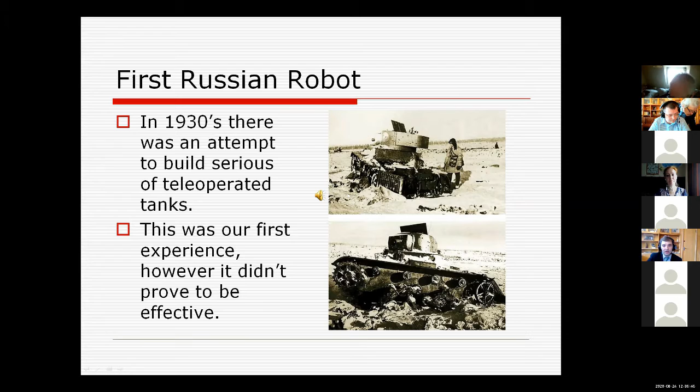But to tell you the truth, finally, this experience was not recognized as successful, as effective, and this program was cancelled. Our first success came in the 1970s with the two moon rovers called Lunokhod. The two rovers were launched, one in 1970 and another in 1973. Both of them were teleoperated, so the crew was sitting on Earth and sending signals to the rover. Then the rover was performing an action, and feedback was coming to the operators, and they were watching what was happening and creating new commands.

Of course, maybe from our today point of view, this was a rather primitive system. However, I want to admit that the record of the extraterrestrial trip of these Lunokhods was overcome only 40 years later, so about 5 years ago, by the NASA Mars rovers.

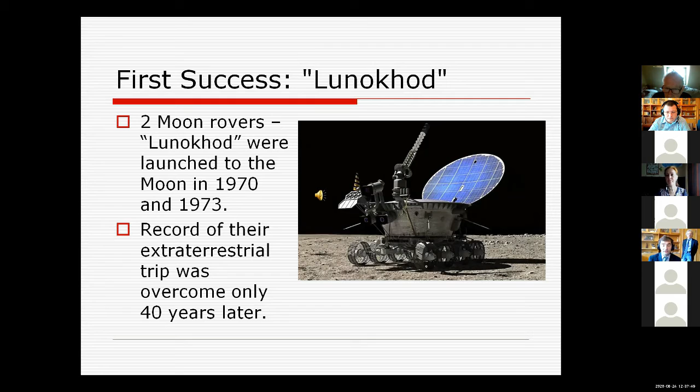In the 1970s and 1980s, there was a big challenge to robotize Russian industry, and there was a special national program, and about 100,000 industrial robots were built and installed within Russian industry. You see a photograph of some of them, and a lot of robots were produced in Russia at that time. Most, of course, were used in the automotive industry, but also in other industries.

And when I was an undergraduate student, we used to have a traineeship in one of the factories in Moscow, and we saw them working with machine tool systems. However, to tell you the truth, this experience was not so successful. Also because some of these robots were not reliable enough. Also because the philosophy of bringing robots to industry at that time was just replacement of the human worker.

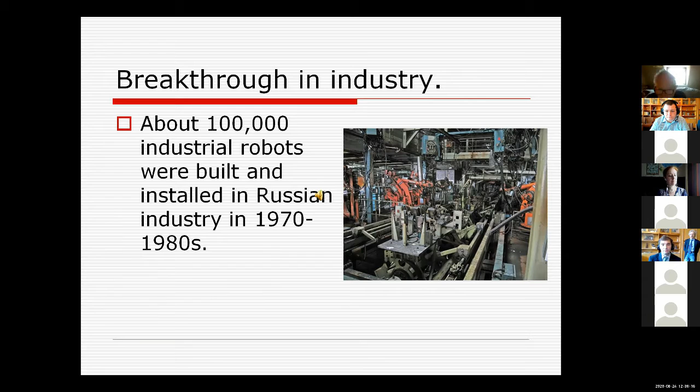However, this turned out not to be a correct philosophy, because bringing robots to industry is creating a new way of technology, a new industrial concept, which was not understood at that time, and those 100,000 robots didn't bring a big effect to national industry. Actually, a big challenge came in 1986.

I call this slide "nothing so bad as not to be good for something." It came with the Chornobyl Nuclear Power Plant catastrophe. As you know, it happened on the territory of modern Ukraine, but at that time actually all the Soviet Union had to deal with this catastrophe. And one of the tasks was to collect radioactive debris from the roof of the nuclear power station.

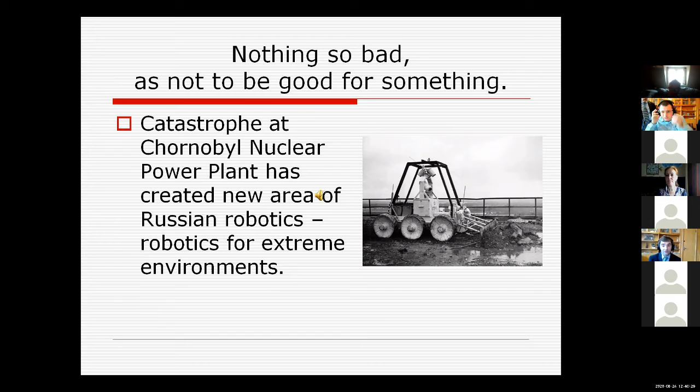Initially, some robots were brought from abroad, but the level of radiation was so high that microelectronics couldn't function. We said that the robots became crazy. They stopped being operable. And then several robots were built in Russia, and one of them you can see on that very roof. And actually it gave a new impetus for the new area of Russian robotics, which we call robotics for extreme environments. And we believe that those robots have saved the life and health of hundreds and maybe thousands of people.

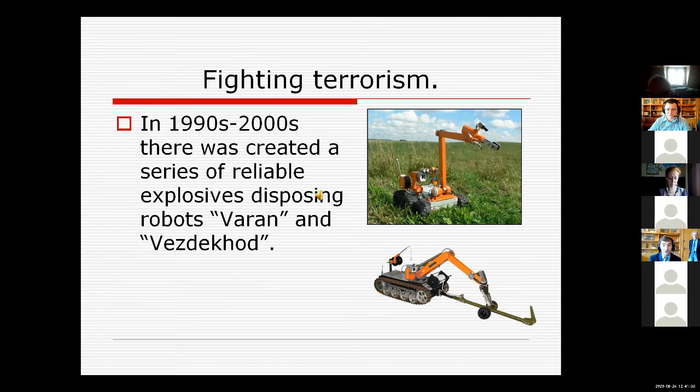Later, of course, the drastic economic transformation in the 1990s caused some decline in Russian robotics. However, some robotics still survived and acted. As you know, in the 1990s we had problems with terrorism, especially in the Northern Caucasus, and this called to life a series of reliable robots which could dispose of explosives. They were called Varan and Vezdekhod, and they were designed at the Bauman Institute in Moscow and produced at the Kovrov electromechanical factory. Several thousand of these robots were built and are still acting in security offices all over Russian territory.

Another stream for nuclear plants was generated in the 2010s when Southern Federal University, together with the Russian Atomic Agency, created a robot for manipulation with fuel elements at nuclear power stations. As you know, fuel elements have to be removed from time to time, usually once a year. They have to be removed within the reactor. And during this removal, the reactor is not functioning, so the power station is not producing electricity, which is a loss of efficiency.

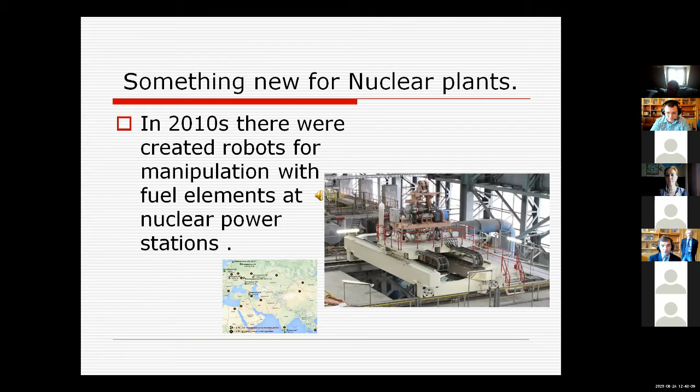And a team of these prominent people created a robot to make this manipulation with fuel elements. And besides manipulation, a big deal of trajectory optimization and control of the functionality of fuel elements was done, and through introducing, I think, 6 or 7 of these robots within Russia, we got more than 300 million dollars of additional income to atomic energy each year, because the service time was decreased. And some of these robots were also installed abroad, outside of Russia.

Another interesting company producing robots for municipal services is called TARIS. You can see one of them on this picture. They have produced a series of robotic crawlers for pipes of different diameter and of different functionality. And it could not only inspect the pipes, but it also could make simple repair works within the pipe. And some of these robots were first produced for Russian municipal services, and some were exported to other countries.

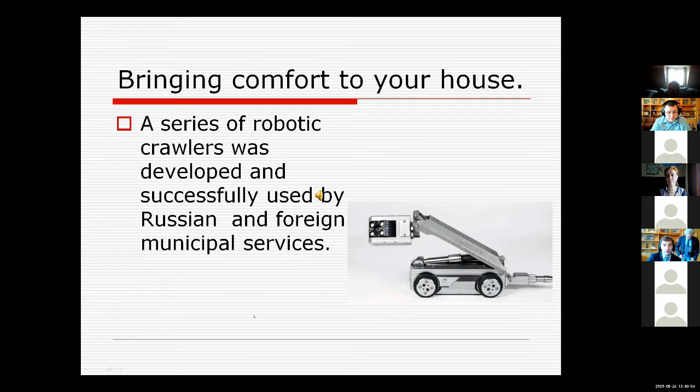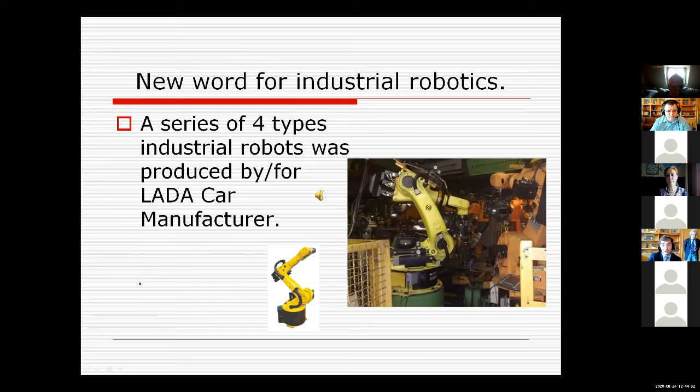In the 2000s, a new industrial robotic program was started by LADA Car Manufacturing, because the automotive industry was still the main consumer of industrial robots. And a special department of this car manufacturing company created 4 totally new types of industrial robots, and they were produced and installed within the factories of LADA car manufacturers.

Now let's speak briefly about the main players. Of course, I would not be able to name all the robotic laboratories and companies within Russia. It would take a lot of time.

However, I wanted to give you an overview, and I also hope that with this you may find some possible partnership links for your future research.

Now, as I promised you, a couple of words about Russian Academy of Sciences. In 3 years from now, it will celebrate 300 years. It was started by our Tsar Peter I. And actually now, Academy of Sciences unites about 400 research institutes. And what is the most interesting, that they come from various research aspects: from humanitarian, from medicine, from agriculture, from mathematics, physics, mechanics, informatics, biology, and so on. So this gives us, as I said before, a special opportunity for cross-fertilization and for getting new ideas, because we intensively communicate with each other.

In our Academy of Sciences, we do not have a special separate institute for research in robotics, but these activities are coordinated by Scientific Council for Robotics and Mechatronics of Russian Academy of Sciences. And as you know, it has participated in helping to organize this conference. And this council unites about 50 specialists in robotics from all over Russia. And what is important, not only from academia, but also from industry, from university, from decision-making governmental bodies. So it's a very good place to meet and to discuss the needs, the possibilities, the opportunities in our robotics research.

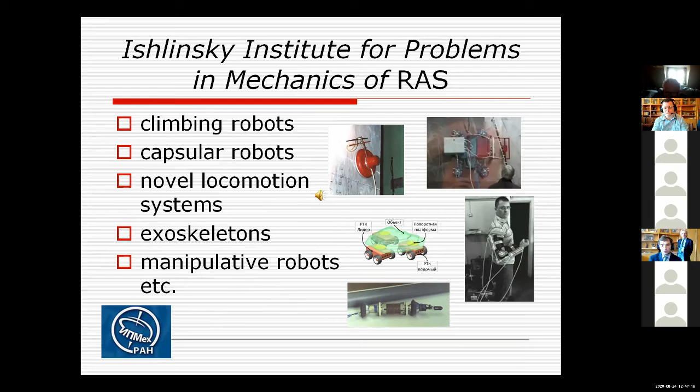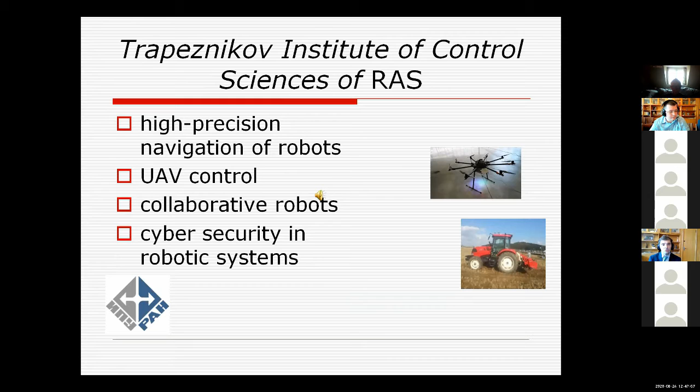Our, I call it a brother institute, is Institute of Control Sciences of Russian Academy of Sciences. They have some good achievements in high precision navigation of robots. You know, it's especially important for robots in agriculture when you need precision better than decimeters. It also has good results in unmanned aerial vehicles control, collaborative robotics, and a new area they have started: cybersecurity in robotic systems.

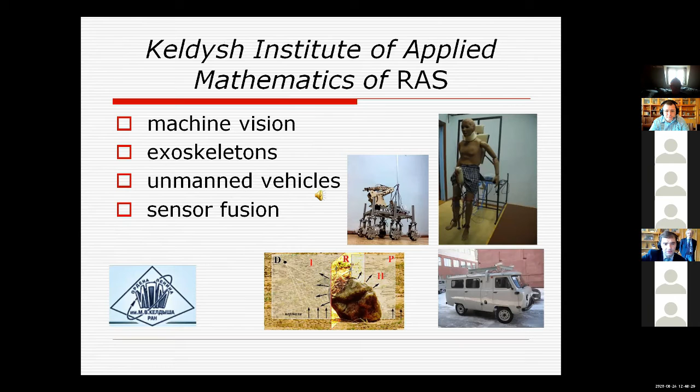Another institute is called Keldysh Institute of Applied Mathematics of Russian Academy of Sciences. They make research in machine vision, also exoskeletons, especially with application to the medicine. And they have a special program for unmanned vehicles. You can see it on one of the photographs below, and research in the area of sensor fusion.

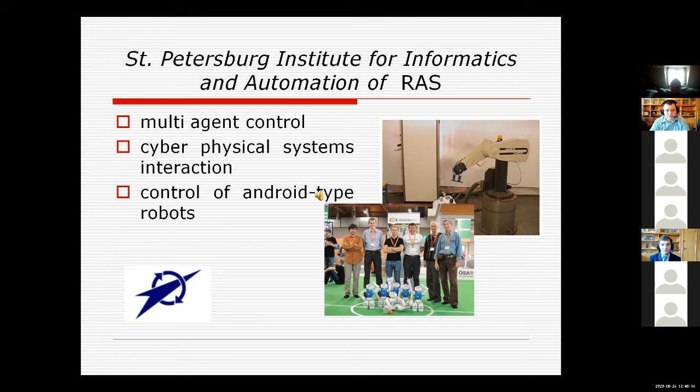Now continuing with Russian Academy of Sciences, but if we move outside of Moscow, it's of course St. Petersburg Institute of Informatics and Automation of Russian Academy of Sciences. You see they have a very active team in the area of multi-agent control, and they participate in a lot of international competitions in this area, like in robotics football. It's also cyber physical systems interaction and control of Android type of robots. On the other photo below, you can see there was a special research done in the manipulative robot for the space program.

Now, Mechanical Engineering Research Institute of Russian Academy of Sciences, it's back in Moscow. They are very good specialists in manipulators with a closed kinematic loop. Actually, they have done a big research on different types of closed kinematic loop manipulators and have studied the efficiency of various schemes and produced recommendations which could be very useful for building new robots.

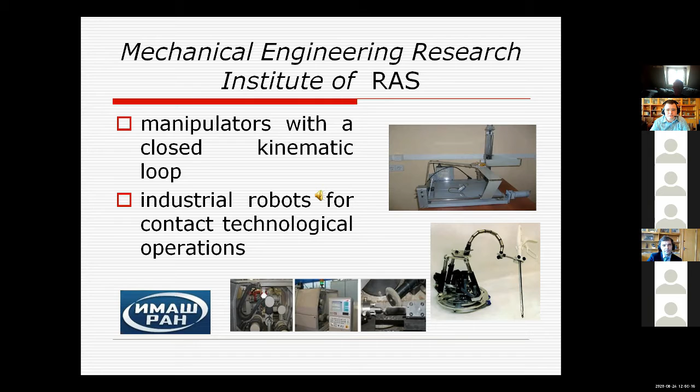And also they have some good advanced results for bringing industrial robots for completing contact technological operations, like polishing turbine blades. You can see it on the photograph below, and some of their robots are installed in the aviation turbines factory in Moscow.

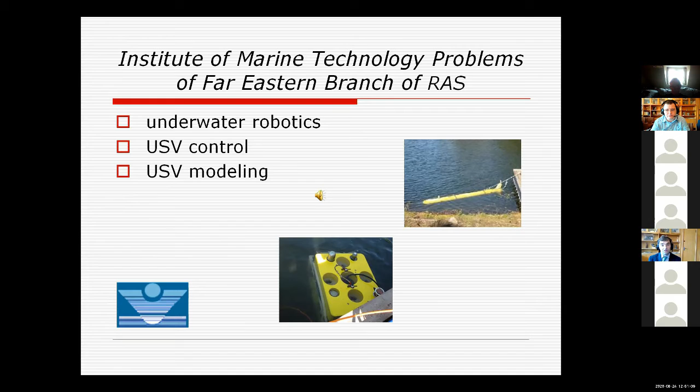Now, if we move to the Far East, we have there an Institute of Marine Technology Problems, and an interesting fact is that for maybe 20 or 30 years, this was the only body in Russia producing submersible robots. So no company was producing, only this academic institute was producing underwater robotic systems. And of course now they are joined by big maritime technology companies, and now this institute can specialize in submersible robots control and modeling, where they're very good experts.

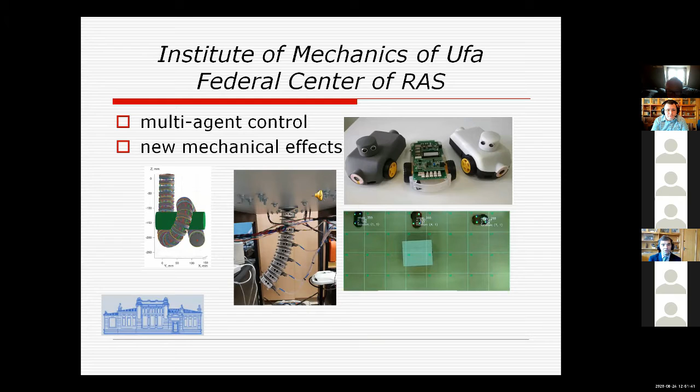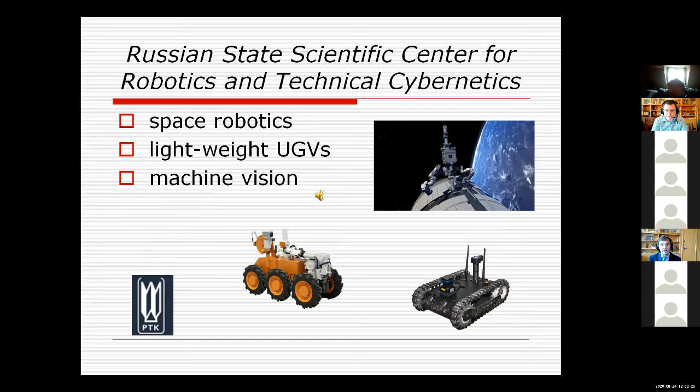Now we speak about other universities and research institutes outside of Russian Academy of Sciences. In St. Petersburg, we have a big research body which is called Russian State Scientific Center for Robotics and Technical Cybernetics. Actually, this center initially was started as a center for design and building robots for the Russian national space program. And they are very good specialists in space robotics. I know they have some good collaboration links worldwide, but also they produce lightweight unmanned ground vehicles and have a strong position in machine vision.

Back in Moscow, Bauman Moscow State Technical University. This university, I would say, is the chief research body among universities in the area of robotics, because they have a large variety of robotic research spectrum field. It's industrial robotics, unmanned ground vehicles, unmanned submersible vehicles, medical robots, and now, as far as I know, they create a totally brand new center for robotics and automation, which I hope will be started next year, which will unite under one roof almost a dozen robotic departments within one university.

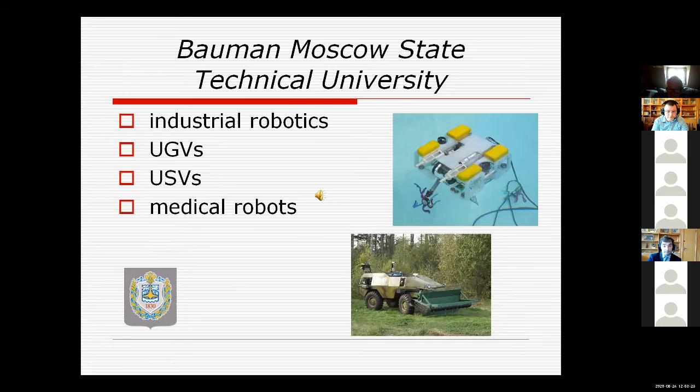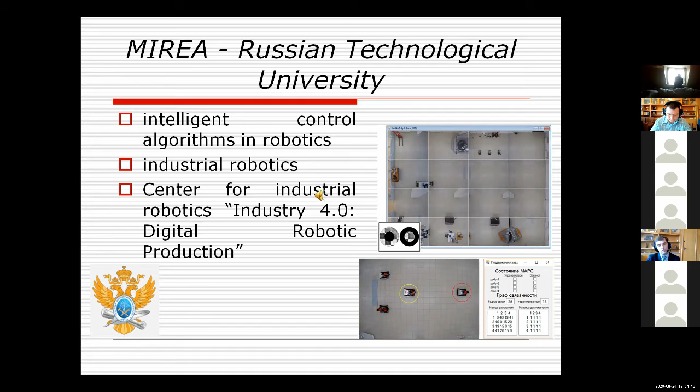What was very challenging for me within this center is that at one place, in one virtually closed system, they were able to present the collaboration of several generations of robots, starting with robots built in the 1980s, 1990s, and up to top modern robotic systems. And all of them were acting in one big system.

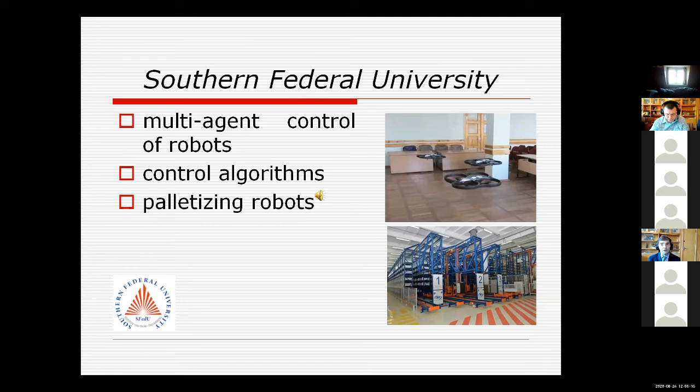Southern Federal University is a big university which unites a lot of research institutes, and one of them has a long-term history of multi-agent control of robots, and I consider that it is the chief research body in the area of multi-agent control for robots. It also has some good results in control algorithms. And as you see on another photo below, they have very good results, and they have also introduced palletizing robot systems to several industrial points.

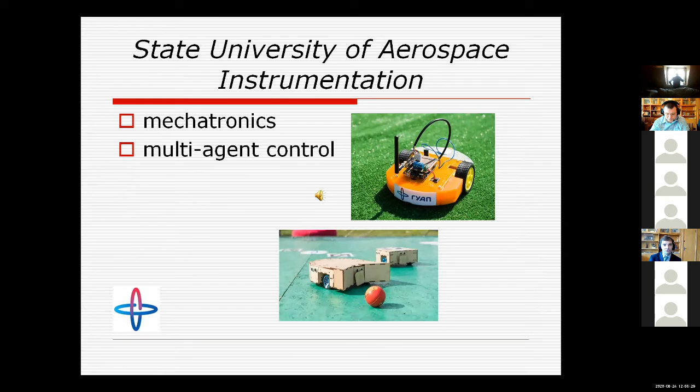Back to St. Petersburg State University of Aerospace Instrumentation, with mechatronic drives and multi-agent control. If we go to the Volga River, Kazan Federal University has a very strong team in the area of intelligent control algorithms, and I believe there are several presentations of theirs within our conference. And they also started a new program in industrial robotics because they have a strong industrial sector in the area of Kazan, especially the aircraft building sector, and also a medical robots program.

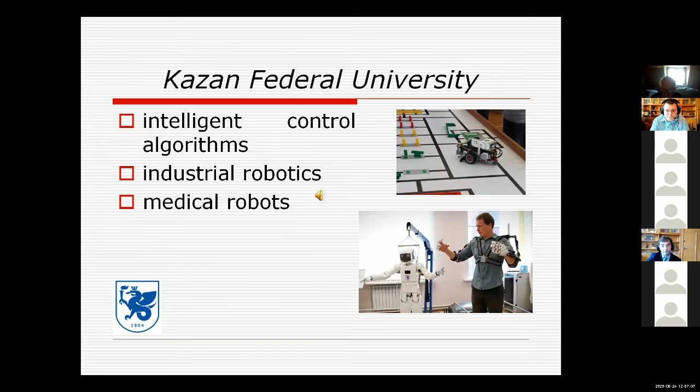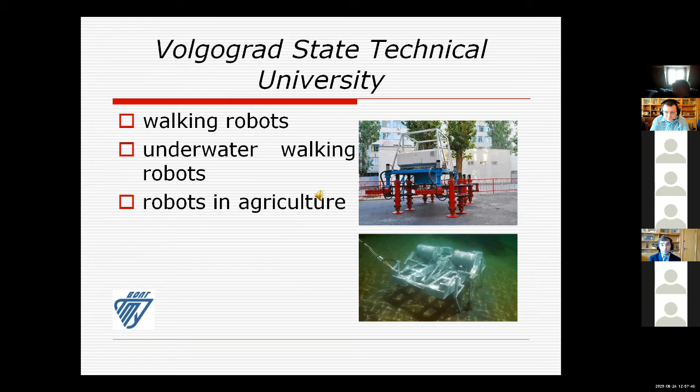Now, our colleagues from the famous city of Stalingrad, now called Volgograd, Volgograd State Technical University. I know they have a lot of presentations within our conference, and the key topic is walking robots. You see one of them on the top photo, and now they bring their robots also under the sea. I hope they will present some of the robots within the program of our conference. Those robots are very effective in agriculture and in emergency systems.

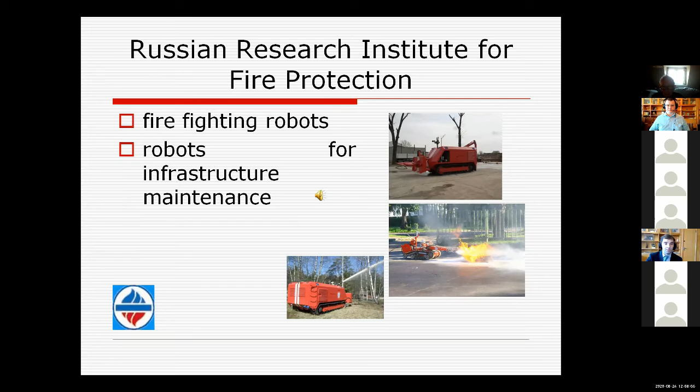Some of the robots are produced for infrastructure maintenance, which is a key topic for a lot of robotics around the globe now. And also very good colleagues of mine at the Dukhov Automatics Research Institute, which is part of the Russian Atomic Agency. As I said, after the Chernobyl nuclear power plant catastrophe, there is a demand that each Russian nuclear power station must have rescue robots on its territory in case of an emergency situation. This company, Dukhov Automatics Research Institute, is responsible for building these robots, training operators, and in case of need, bringing more of these robots to the place of emergency, and they have some very good results in this area.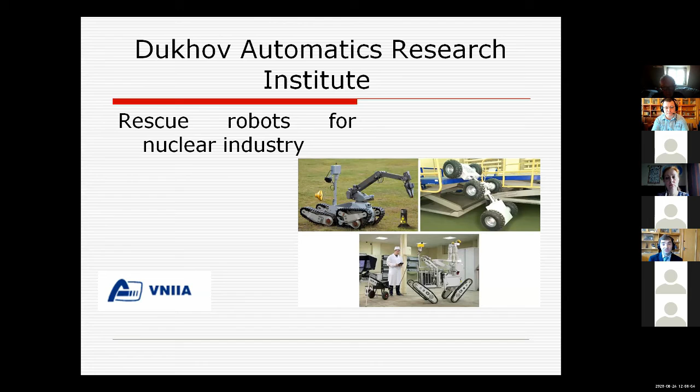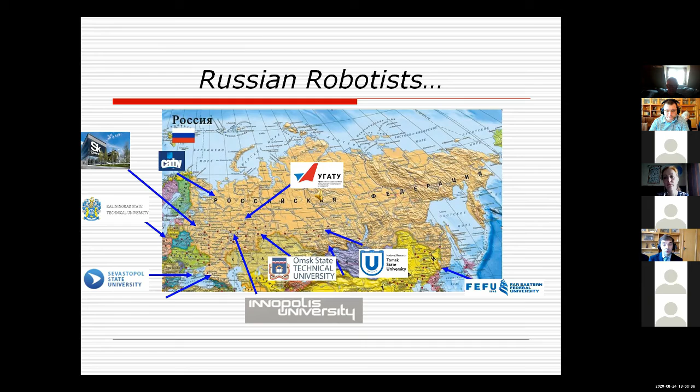As I have said before, there are more places on Russian territory and more universities, like lately we have so-called Skolkovo University, or the special university in Innopolis, Sevastopol in Russian Crimea, Kaliningrad, North Arctic University, Omsk deep in Siberia, Tomsk, which actually has several universities specialized in robotics. And I advise you, in case you are interested, you can either contact those colleagues directly, or you may contact me, and I would help you to build possible collaborative links with those people.

Now, speaking about our view for the future, actually, I hesitated, but finally I decided to bring you this slide, which is called Why Robotics in Russia. First, its industrial potential. As you know, Russia now tries to revive its industry, which suffered a big breakdown in the 1990s. So there is a lot of work for Russian robotics.

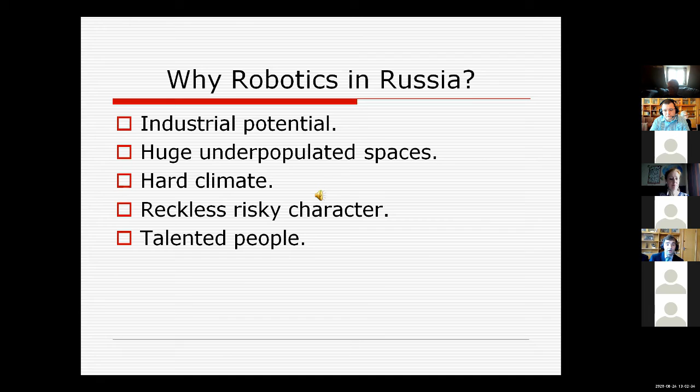And finally, two ideas came to my mind: actually Russians have a, let's call it reckless, risky character. This term came from one of my German friends who said, you know, if you need to invent something to send to the moon or to space, something risky, you should call Russians. That's in their character. They like to do risky things. And finally, we also have, as other nations, talented people, and we believe that we have a good word in the robotics future.

Now, to be more serious, what do we have as future development in robotics? We foresee 5 main dimensions. It's a search for new applications of robots, because we still consider that there are more possible areas for robots to be used in industry, in human society, in research, and so on. Still, all of us who are professionals in robotics must admit that in a lot of cases we are not satisfied with the level of performance of modern robots, so we should increase the efficiency of modern robots. Of course, we should move to application of robots in groups, and this calls for a new challenge to make modern robotic systems more autonomous.

However, autonomy is a good thing, and I'm in favor of it, but still we admit that the majority of modern robots, especially in some important applications, are still controlled by humans, and that's why human-robot interaction, the human-robot interface, is another aspect which we should further work on, especially considering the ethical aspect that in some robotic applications, like robotics for security, a human will always have the final word to make his or her decision for the robot to act.

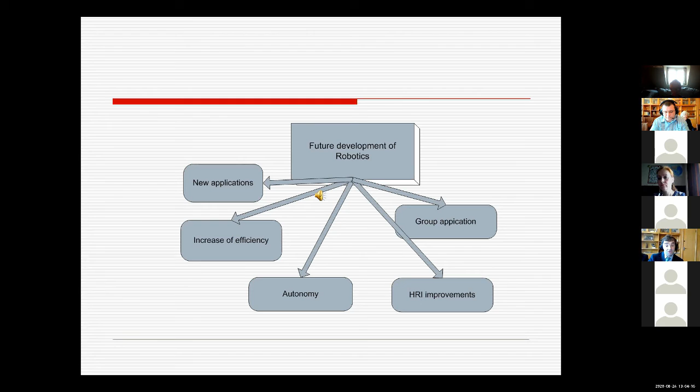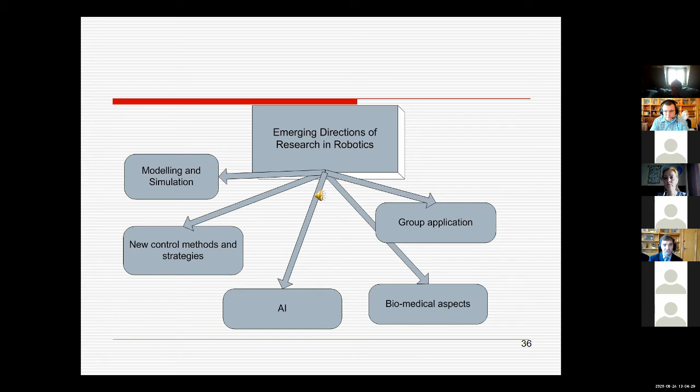As an outcome of this, we see the following emerging directions of research: modeling and simulation, new control methods and strategies, artificial intelligence, group application, and biomedical aspects. Speaking of modeling and simulation, we think that we should produce more advanced modeling of various robots, especially for robots acting in severe or difficult environments. We should create new application scenarios and model those scenarios and simulate them.

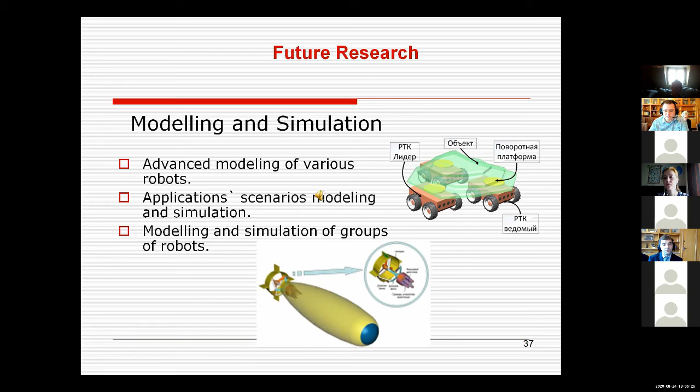Actually, from my point of view, in our future, every company producing robots and selling to the end user should sell not only the robot itself, but also a ready-to-use model or simulation software, so that before using a robot, the end user could check if he really needs it, how he or she would use it. And also a model and a simulation of a group of robots.

Now, new control methods and strategies. A big challenge from my point of view: if you look at the scheme on your right, you see the one produced by us, a hierarchical scheme of control levels, and we try to separate various control tasks performed by a robot into 5 areas. You know, there are various architectures. We have produced this one because we consider it's more intuitively understood by the end user. And sometimes within conferences, and I believe also within this conference, we would have a discussion about which method is better or worse to solve this or that task within the robot.

From my point of view, we would never have universally perfect control methods which would be able to solve all control tasks for the robot. And I believe that for various control levels, for various levels of hierarchy, we would have this or that most effective control method to implement the task. For example, for parameter identification of control in one drive, we know PID. If we go further up, we would have fuzzy logic, neural networks for object recognition. Later we have deep learning algorithms. But if we go up and up and up, I believe we still have to search for which methods are the most effective.

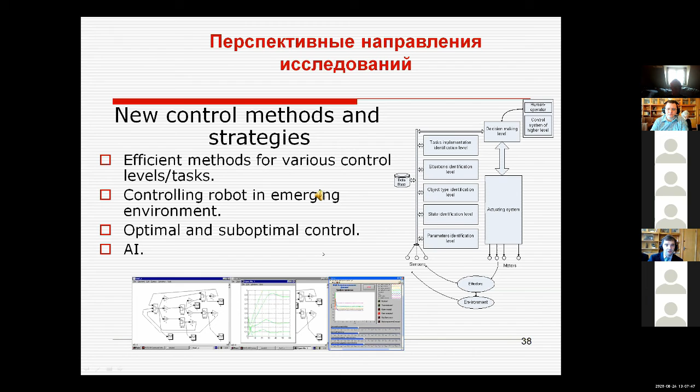Returning to control tasks, it's controlling robots in emerging environments, especially in fast, drastically changing environments, optimal and suboptimal control and artificial intelligence algorithms. Now, for group application, it's methods of controlling robots in various groups for various applications. A big deal: we have to solve the problem of communication of robots within their groups.

And finally, we should always keep in mind that despite unmanned systems on our roads, which are appearing and would appear in more quantity soon, still a lot of systems would be human-driven. And the question of integration of robots with these human-driven machines should still be kept in mind. We should keep them in mind and produce new scientific methodology, new technology to incorporate such systems into one effective system.

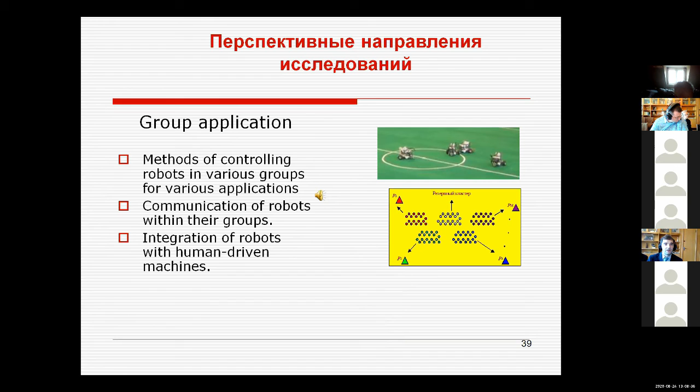And now, speaking of biomedical aspects, we consider we should study more the improvement of human-robot interfaces, including multimodal interfaces, exoskeletons, and psychological aspects of robotics. Actually, last December, our Scientific Council of Robotics of the Russian Academy of Sciences had a special session on this topic where we invited people both from robotics and from psychology, and we communicated and discussed this aspect, and it created a vision that there exist several very serious challenges to be solved.

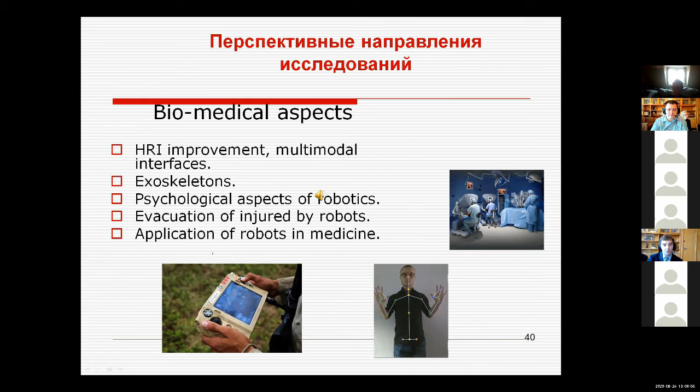Now, from my point of view, yes, of course, robots in medicine, and a very big challenge for me is to create an effective system for robots to evacuate injured people. Now, I have brought you the key players in robotics, our view for future robotics research, and now just very briefly possible collaborative links, because as we know, every collaboration, besides the will of the people to collaborate, is unfortunately always brought down by financial factors, and these collaborations should be supported financially.

Here I brought you three possible sources. One is the Ministry of Science and Higher Education of the Russian Federation, which from time to time launches a special program for international scientists to come to Russia to do research, to build joint laboratories. Another very productive institute is called the Russian Fund of Basic Research, who actually, as you know, co-sponsored our conference. And I bring to your attention that this fund has a lot of bilateral agreements with your national bodies. So you may consult your national Ministry of Education or of Science.

And I know that sometimes such agreements are done not with your national ministry, but with some national body, like with the UK, such agreement comes with the Royal Society. With Germany, it comes with DFG, and so on. There are some grants launched every year, not very large, but sufficient to support such possible collaboration. So I advise you to check the website of the Russian Fund of Basic Research and also your national research supporting body for such programs. And finally, it's the Russian Science Foundation. Also, you may find its website and find information for possible collaborative support.